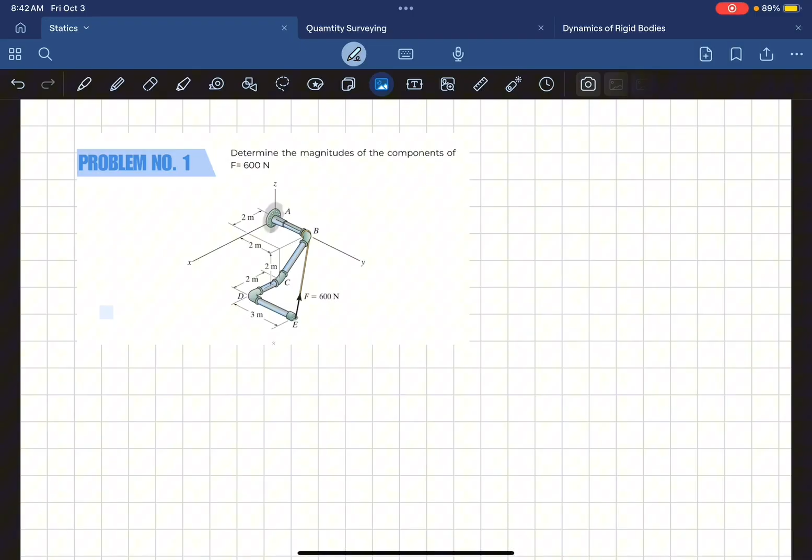So for our first problem, guys, determine the magnitudes of the components of the force 600 Newton. If you're going to analyze the problem, we have here the force which is 600 Newton acting at this vector line or by the line of action, ganyan yung direction niya.

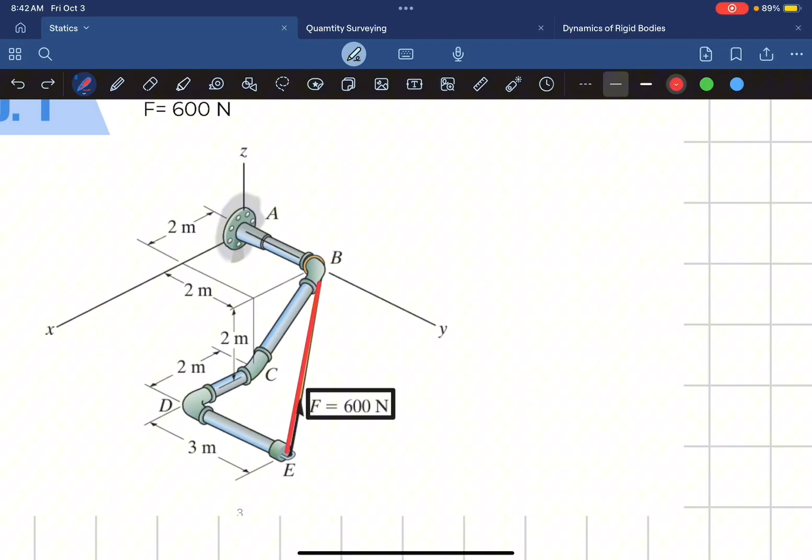Kung titingnan nyo mabuti, ang pinapahanap sa atin is determine the magnitudes of the components of F equals to 600. At meron tayong dalawang notations. Kapag sinabi nating resultant, yun yung combined effect ng mga components.

Okay, pagka-resultant, ulitin lang natin ang konsepto para mas magets natin. For resultant, guys, ito yung combined effects of the components.

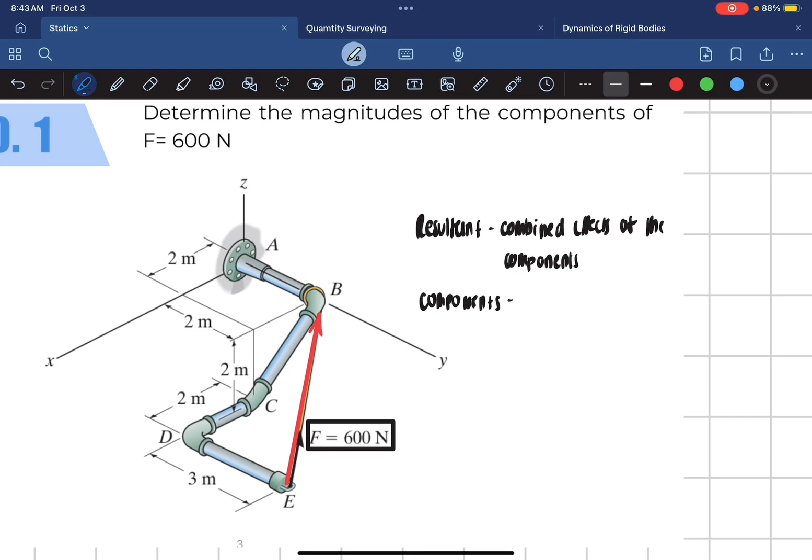Okay, kapag naman sinabing components, ito naman guys yung force produce along the axis. Ano pa yung pagkakaalala nyo? Force produce along the axis.

Okay, these are the individual forces. So individual forces that comprise the resultant.

Ibig sabihin, yung component na yan, para lang yung pagluluto. Meron halimbawa, nagluluto ka ng adobo. Your adobo is the resultant, result ng pagluluto mo. At yung component mo ay the ingredients, halimbawa the toyo, suka, bawang, sibuyas, yun yung components mo.

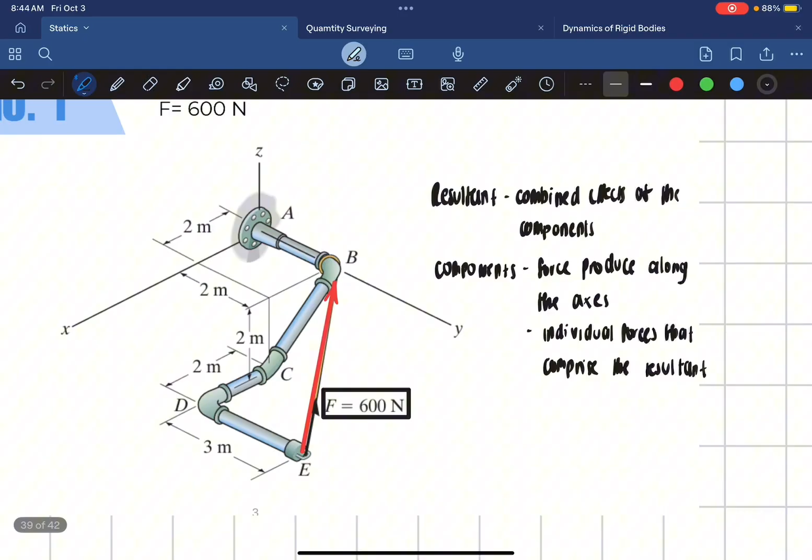Ngayon, if you're going to get the resultant, kailangan mo pagsama-samahin yung combined effect nung mga components mo para makakuha ka ng resultant. Mabalik tayo sa pagluluto. Bago ka magkaroon ng adobo, kailangan mo pagsama-samahin yung mga rekado mo, the suka, toyo, bawang, sibuyas and all, para makuha mo yung desired result mo, which is the adobo.

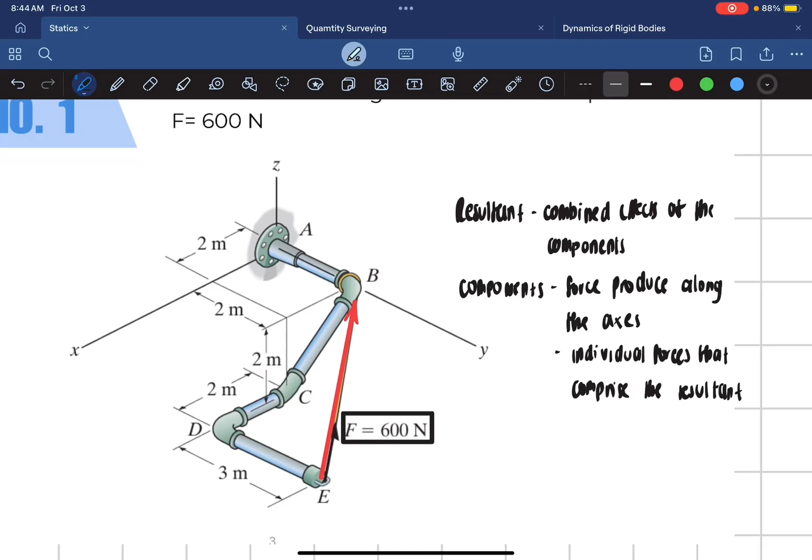So yun lang naman ang ano. Ibig sabihin, pagka pinapahanap sa atin yung component ng force, kailangan nating paghiwa-hiwalayin ngayon yung effect nung force na yun sa different axes.

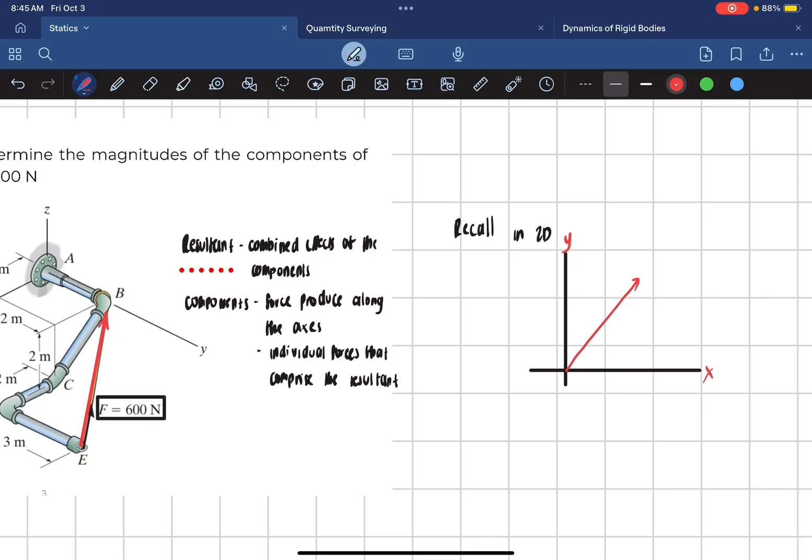Tama? Sa 2D guys, recall natin. In 2D, kung mapapansin nyo, basically ang ginagawa natin dito, if we have force directed along this y and x axis, tinatawag din natin in 2D as horizontal and vertical.

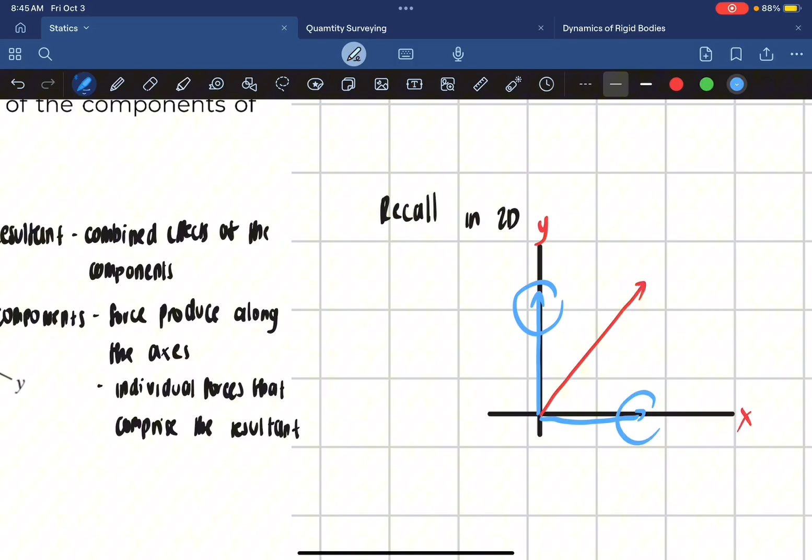Ibig sabihin, magkakaroon ka o masaseparate yung forces mo along the y and along the x-axis. Pag pinagsama mo yung combined effect nitong Fy at Fx, nakukuha natin yung resultant natin which is ang F. So ganun din sa 3D.

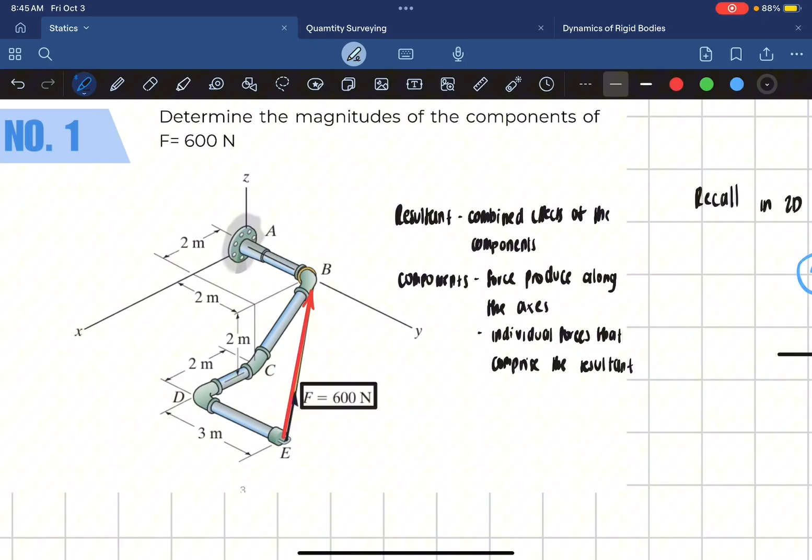Okay, nagkakaintindihan. So ngayon, ang pinapahanap sa atin is determine the magnitudes of the components of F equal to 600 Newton. Ibig sabihin kailangan nating kunin. Kung titingnan nyo, asan ba yung axis natin? Establish natin yung axis natin.

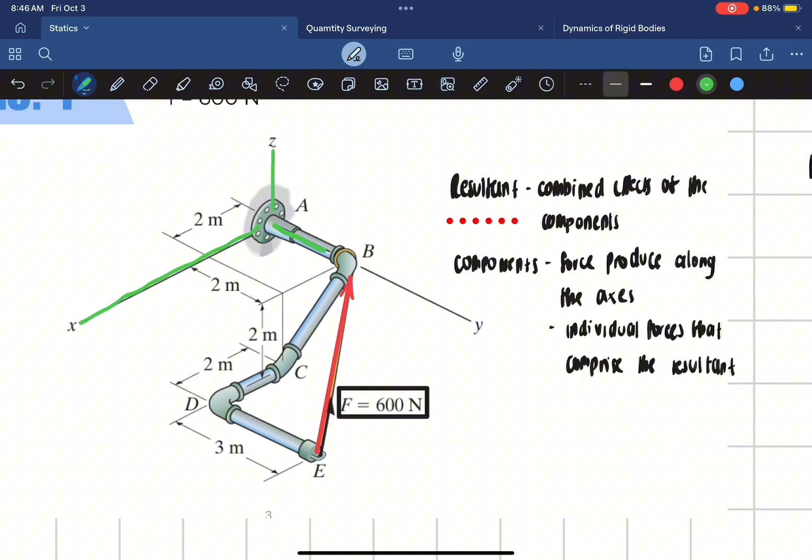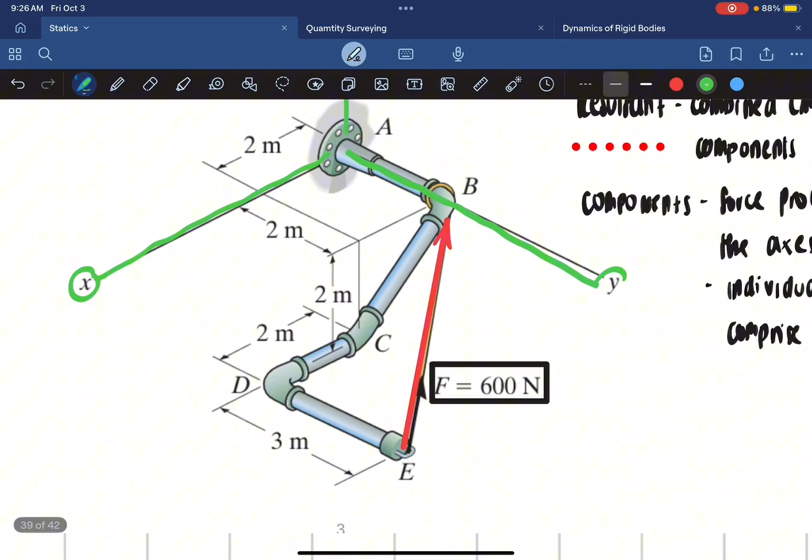Okay, ito yun, which is the positive x, the positive z, at the positive y. Ibig sabihin, along that axis or parallel to that axis is yung mga components na hinahanap natin. Imagine that this is your x, this is your y, and this is your z.

Ano ba yung mga component natin o paano natin hahatiin yung mga forces natin? Kung titingnan nyo mabuti, yung direction ng force natin is papunta doon. Ano ba sa tingin nyo yung direction ng mga forces na mapoproduce niya? By looking at this, parallel to x-axis, so gawin ko red parallel to this axis.

Ano ba yung makikreate ng 600 Newton natin. Ang parallel dyan, pwede ko bang sabihin na eto. Yan ngayon yung magiging Fx mo.

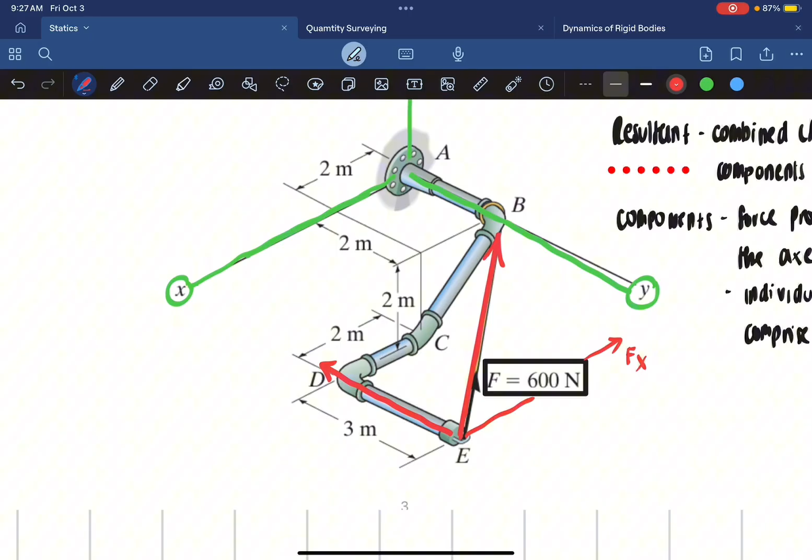At ngayon, parallel to y-axis naman, yan naman yung magiging y component mo. So parallel to this axis, eto naman ngayon yung magiging force component mo for Fy. At how about the Fz? Ang Fz naman natin is parallel to the z-axis.

Ibig sabihin, if this is your z-axis, therefore ang Fz mo is along to this line of action naman. So this is your Fz naman. Okay, at ngayon, paano natin gagawin yan o paano natin kukunin yan?

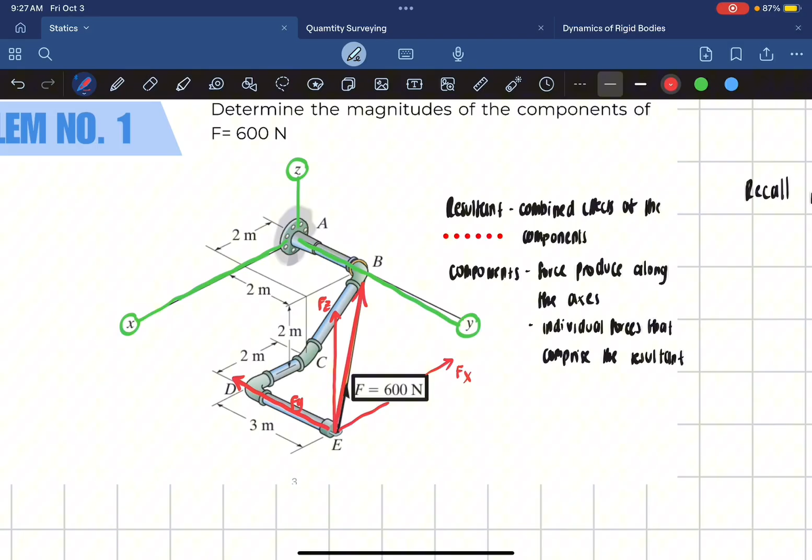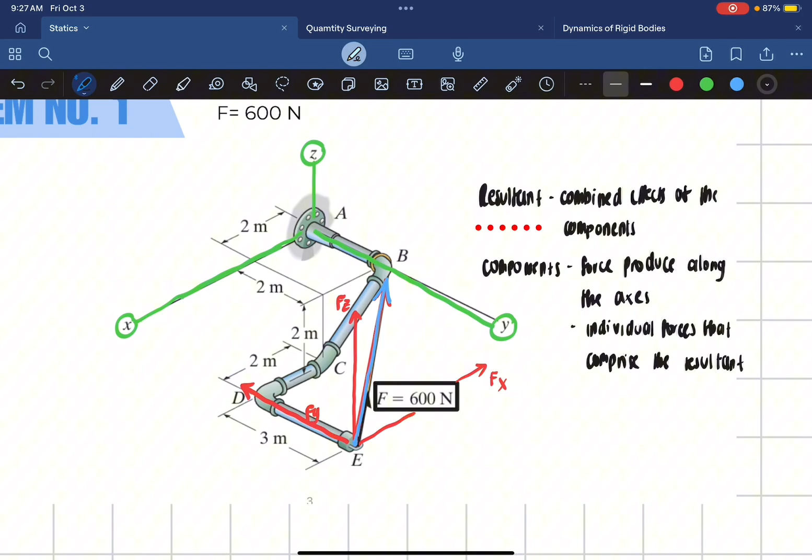Sige, baguhin ko yung kulay for the resultant, gawin ko lang blue. At ngayon, ano ba yung ginagawa natin para makuha natin? By slope form, di ba? Paulit-ulit na lang natin ginagawa ito.

Una natin is to establish the point coordinate. Tingnan mo mabuti, nasan ba papunta yung force BE mo. Ibig sabihin, establish muna natin point coordinate for E. Ano sa tingin nyo yan? Mula dito, mula dyan, ano ngayon yung coordinate mo along the X? Mula dito, papunta dito, and then papunta dito pa, kapag wait lang.

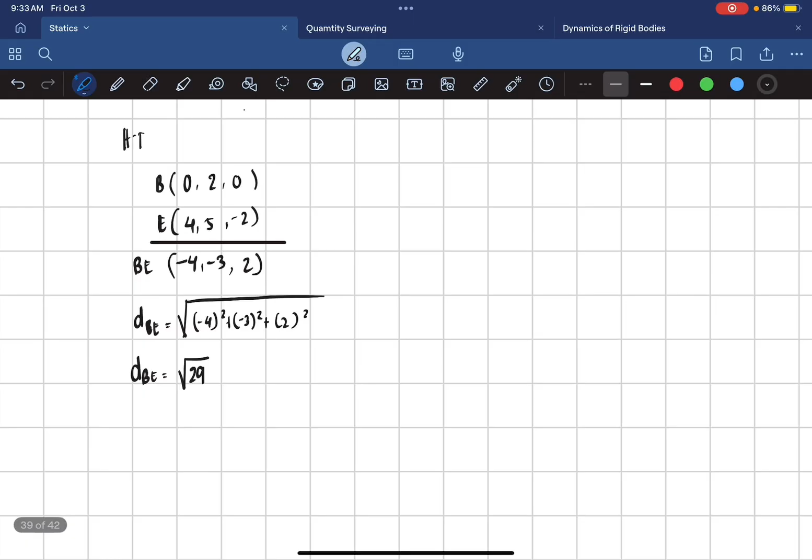Recalling, guys, if nasa resultant tayo, for your Fx, hindi ba slope form yan ng F and then Dx over D. Okay? In this instance, minsan ko lang gagawin ha, for Fx ng BE, okay?

This is for Fx ng BE is equal to force ng BE times DBEx over the DBE. Okay?

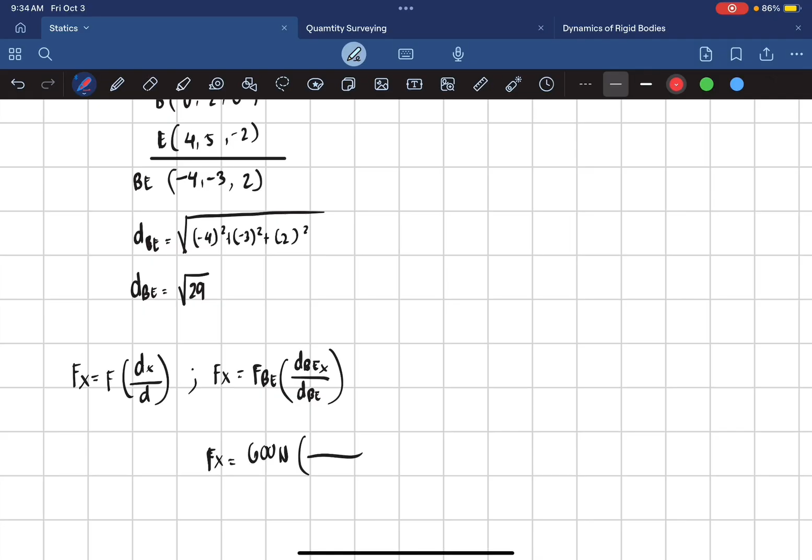Ibig sabihin, for your Fx, sige nga, gawin na nga natin. For Fx, ang FBE natin, ano ba yung force ng BE natin? 600 Newton. So, 600 Newton, multiplied, ano ba yung DBEx? Papalitan ko ng kulay. For DBEx, simple, ito yon. Ibig sabihin, this will be your negative 4, okay?

And ano ba yung DBE? Simply, yung resultant na position vector mo for force BE. So, ibig sabihin is over square root ng 29. Iibahin ko yung kulay. And then for Fx, simply equal to 600.

600 multiplied by negative 4 over square root ng 29 is equal to negative 445. So, ibig sabihin, negative 445 Newton.

Ano yung denotation pagka meron tayong negative? Ibig sabihin lang, 445, di ba nga ang assumption natin that papunta dito is your positive x-axis, papunta doon is the positive z-axis, okay? And then papunta naman along the y-axis is the positive y-axis.

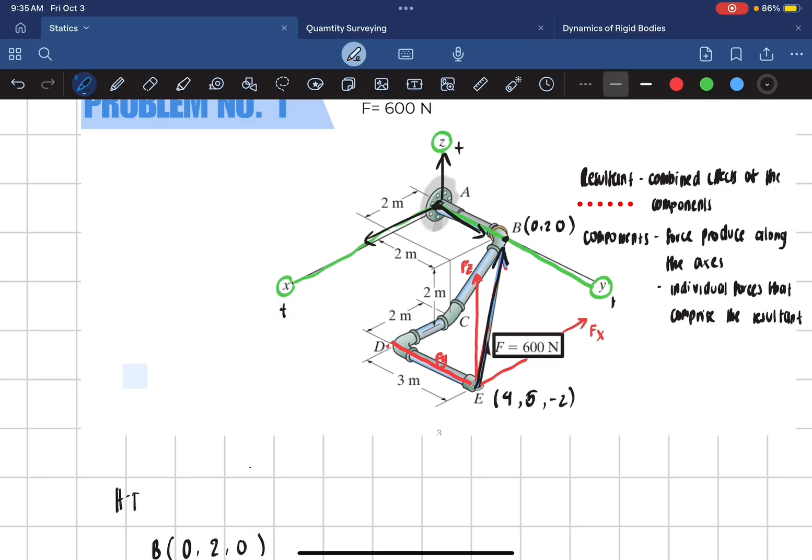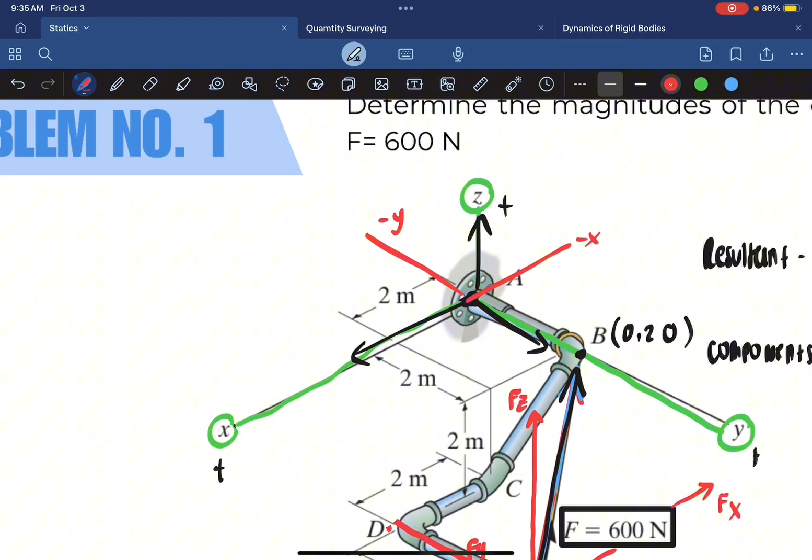Ngayon, kukulayan ko na red. Pagka kumabila ka doon along the x-axis, ito yung magiging negative x-axis mo. Mula dito, kumabila ka along the y-axis, ito yung negative y-axis. And for the negative z-axis, mula dito pababa, this is your negative z-axis. Ibig sabihin lang ng negative 445 na to, papunta siya doon sa negative axis.

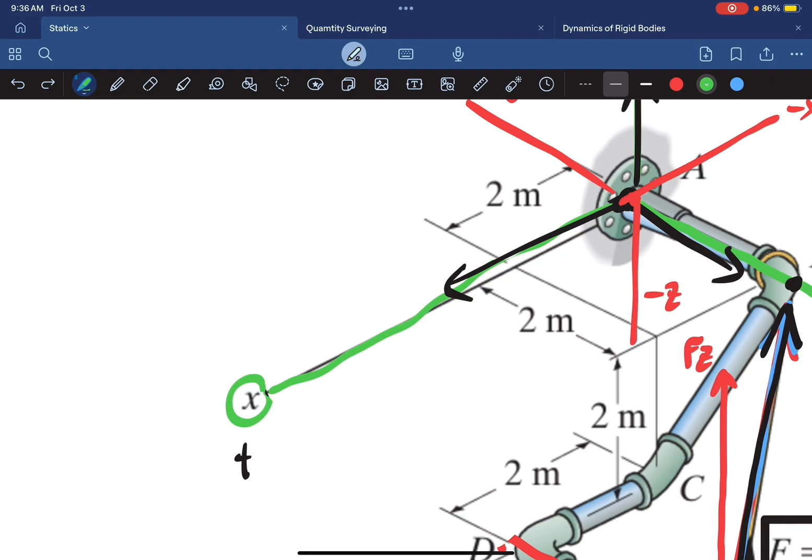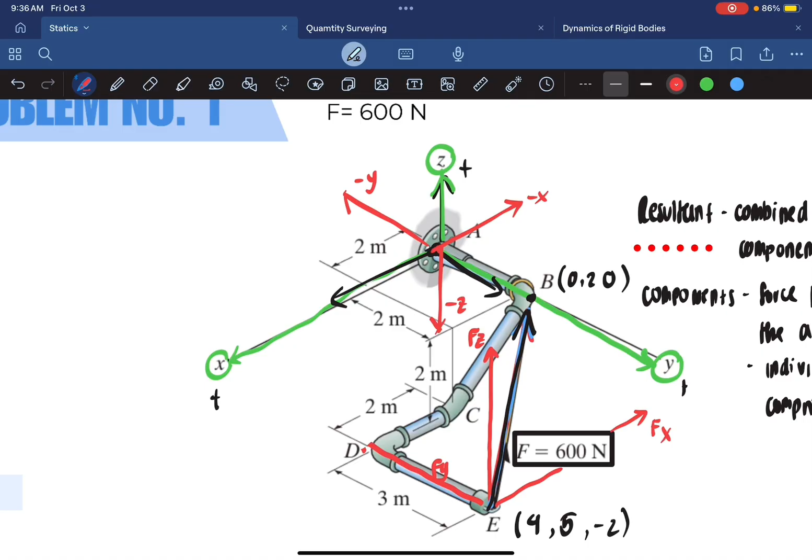Ang direction niya, tingnan mo mabuti. Ang positive natin is papunta dito yung x, papunta doon yung y, and papunta dito yung z. For negative axis, papunta doon yung x, papunta dito yung negative z, and papunta doon yung negative y. Na-prove yung assumption natin kanina sa drawing. Since negative 445 siya, 445 Newton to the negative x-axis.

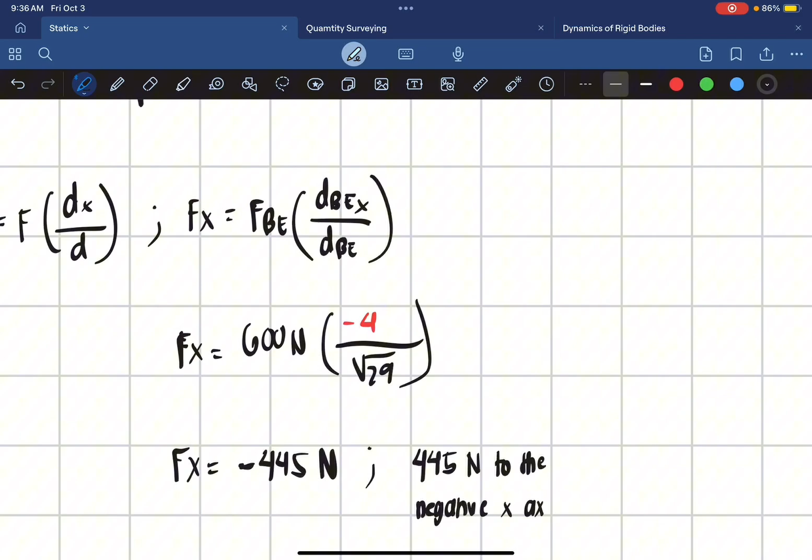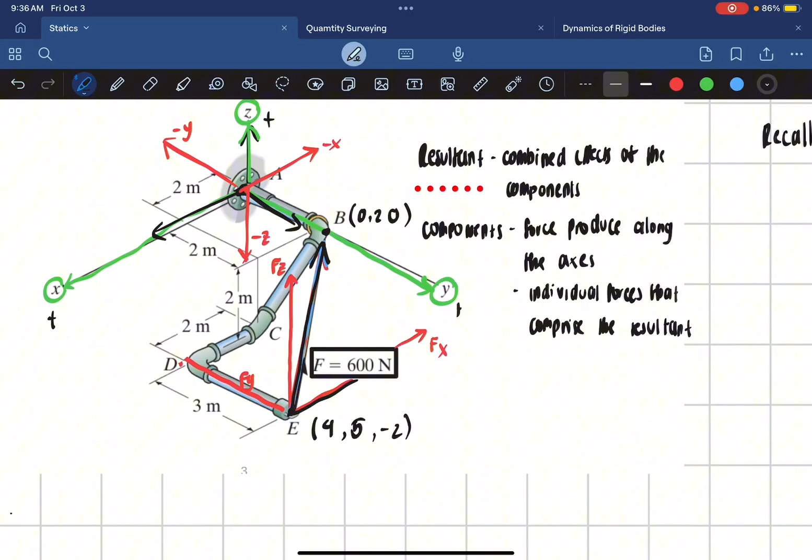Kung titingnan nyo yung figure, yung x component ng force F natin is papunta doon. Tingnan nyo mabuti. Di ba same direction sila? Tama. Papunta siya doon sa negative x-axis natin. So, we're done with our Fx. Ganun lang kasimple. And for our Fy, ano naman?

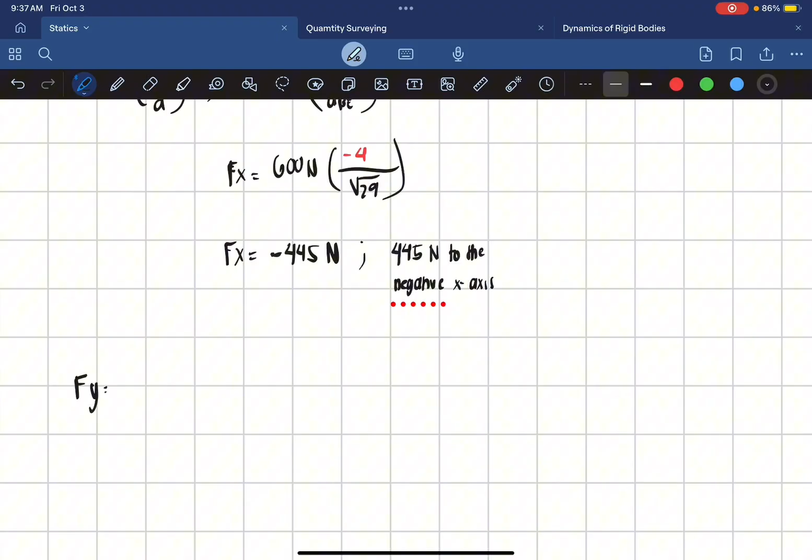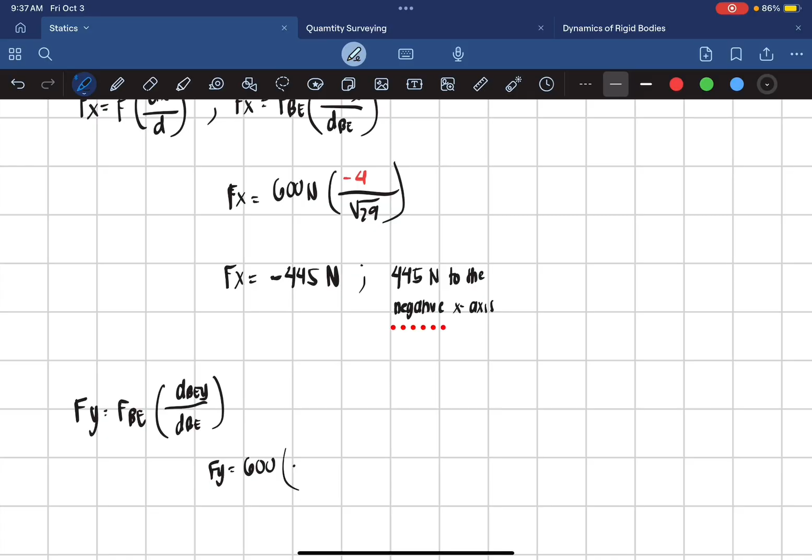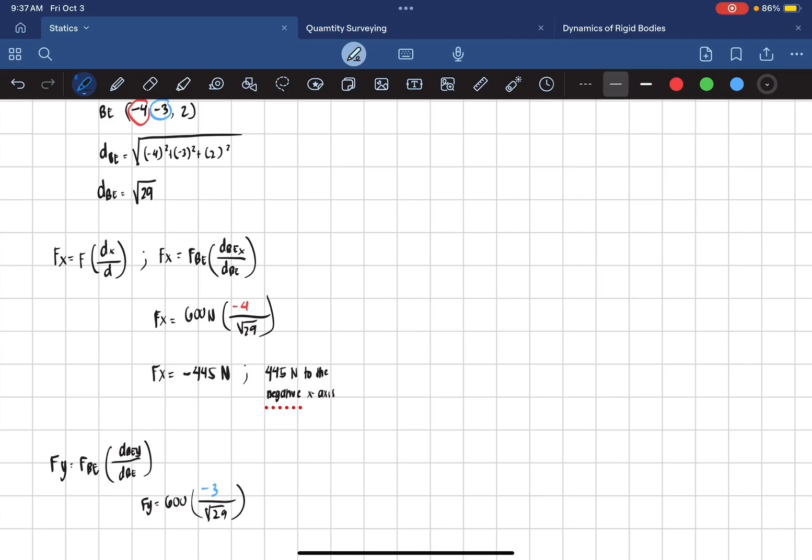Fy is simply equal to FBE multiplied by DBEy over the DBE. And then for Fy, equal to 600 multiplied by, bibilugan ko ng blue, negative 3 over square root ng 29. Fy is equal to ilan?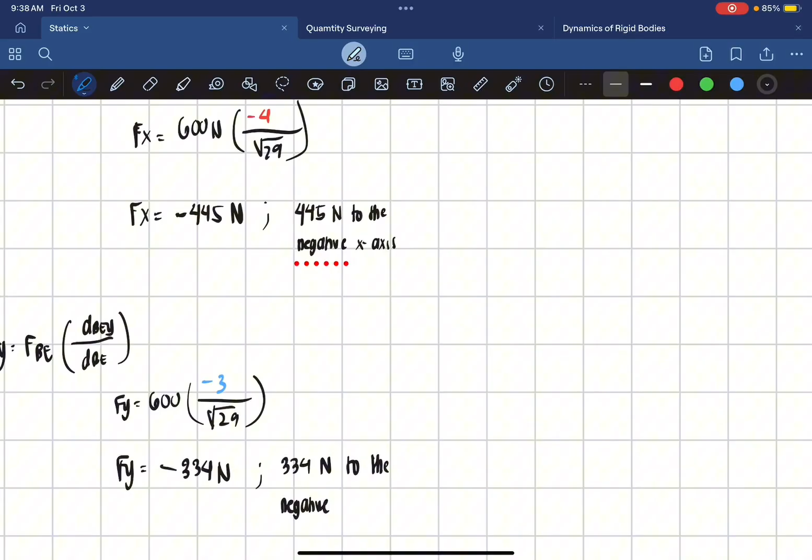Kung kukumpitin mo yan, negative 3 over square root ng 29, makakuha ka ng negative 334 point something. For discussion purposes, negative 334 na lang ilalagay ko. Kapag negative, since nasa y-axis tayo, yung force natin is 334 Newton to the negative y-axis. Asan ba yung y-axis natin?

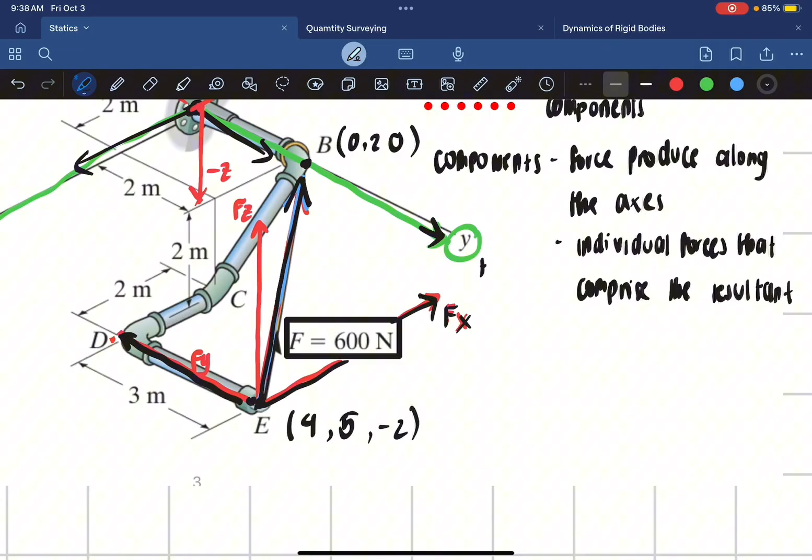Di ba ito yung y-axis natin? Ito yung positive y-axis natin. Sinabi that yung Fy natin is direction towards the negative axis, which is opposite to the direction of your positive y-axis. Tama. So, dalawa na. Nakakuha na tayo ng Fx and then Fy.

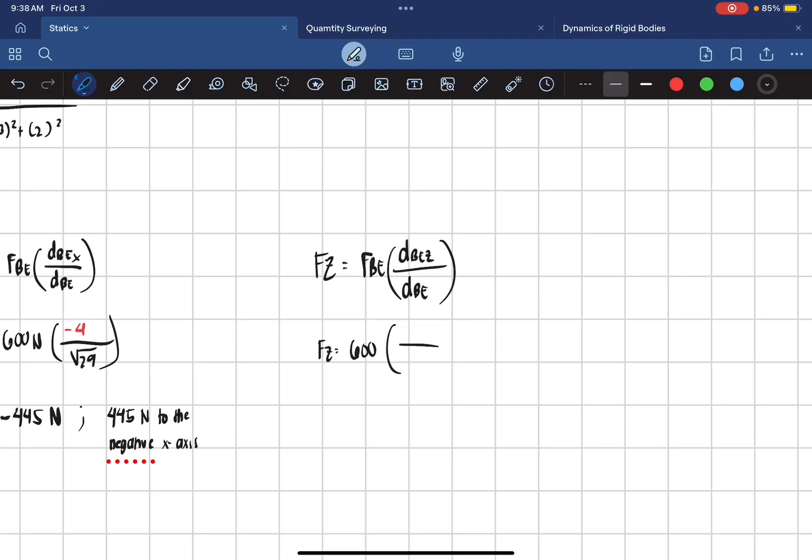And for the last one, we have the Fz. Dito na lang siguro, para hindi na malayo. For Fz, simply equal to the FBE multiplied by DBEz over the DBE. So your Fz is equal to 600 multiplied by, papalitan ko ng color. Ano ba yung DBEz na tinatawag natin?

Ito yun guys, the z component of the position vector. This is 2 over the square root of 29. Now, for your Fz, 600 times 2 over square root ng 29 will get 222 Newton. Since positive yan, 222 Newton to the positive

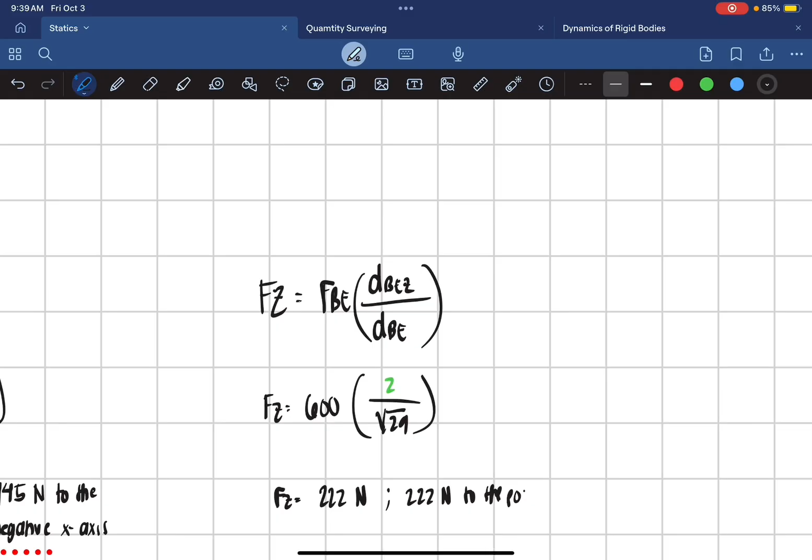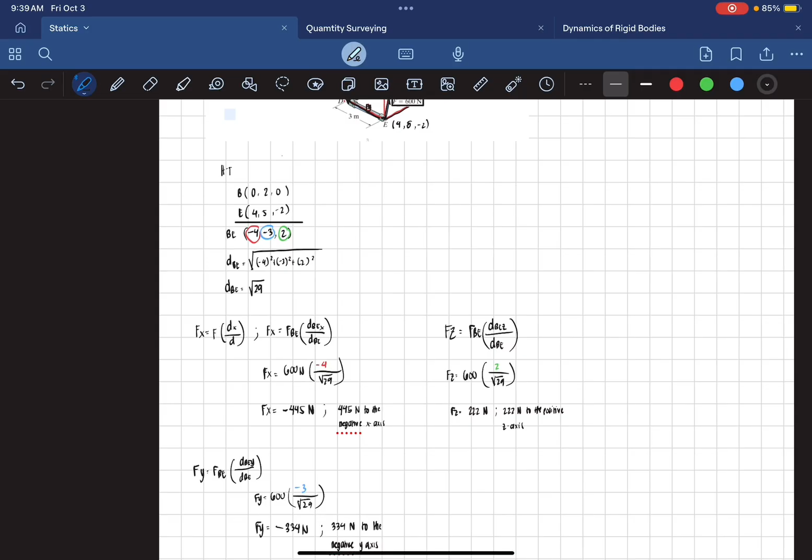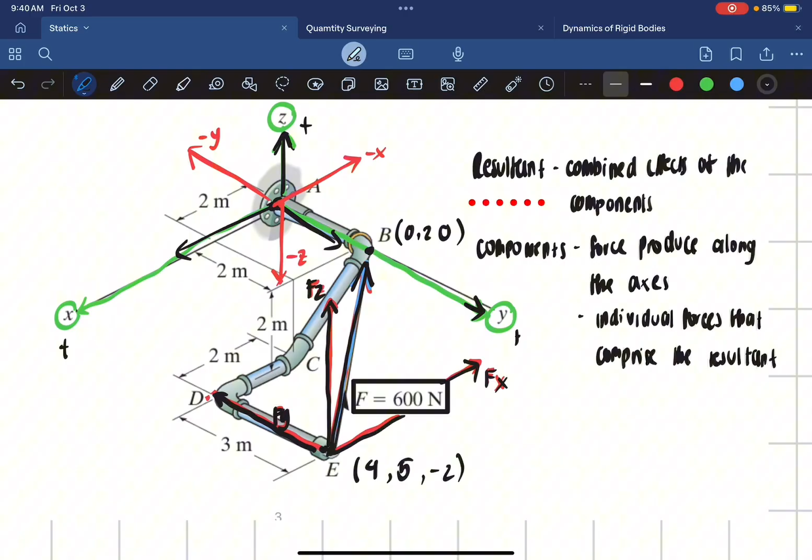z-axis. Ito ngayon yun. Na-satisfy din yung assumption natin sa direction ng force. This is a positive z-axis, papunta dyan. Since to the positive z-axis siya, paangat din yung direction niya. So, yun. Tapos na yung ating sample number 1.